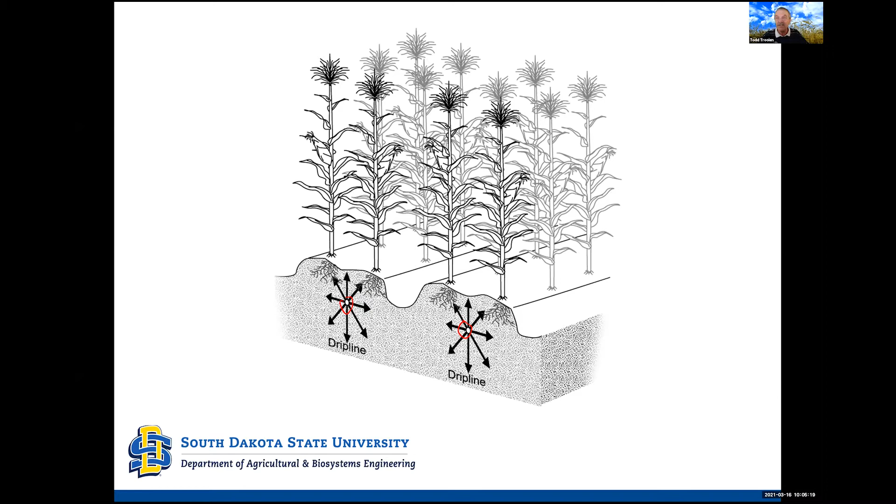So we bury those drip lines maybe a foot, maybe 18 inches deep, anywhere in that range or even a little wider is appropriate. That can be adjusted based on operator preference. Do you want them a little deeper? Do you want them a little shallower for any of various reasons?

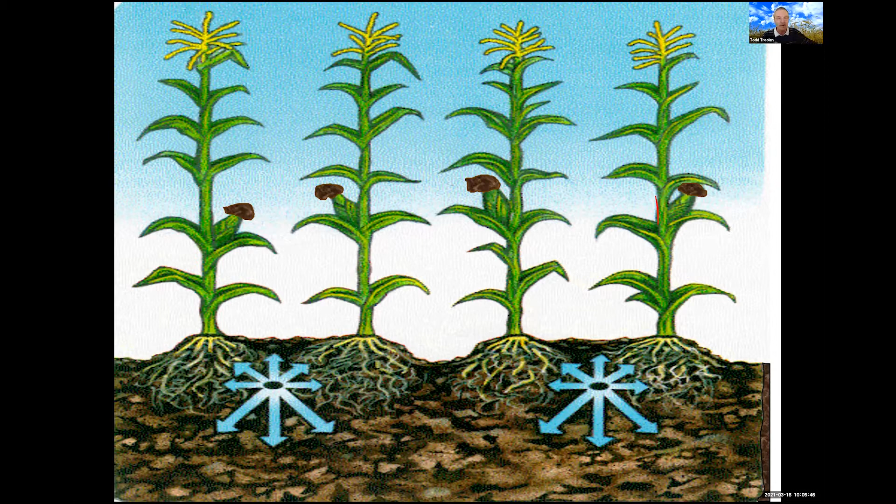If we look at a three-dimensional view, we can see how that works out. Every other pair of crop rows is centered over a drip line. And so theoretically, any plant is just 15 inches from the nearest drip line. And this works well for common soils.

Silt loam soils, clay loam soils, even sandy loam soils. If we get into really sandy soils, then maybe we need to do things differently. And if you have specific operator preferences to do things differently, I know of a producer that actually has drip lines spaced 30 inches apart, and they're really happy with that system. So there are options and adjustments that can be made based on personal preference.

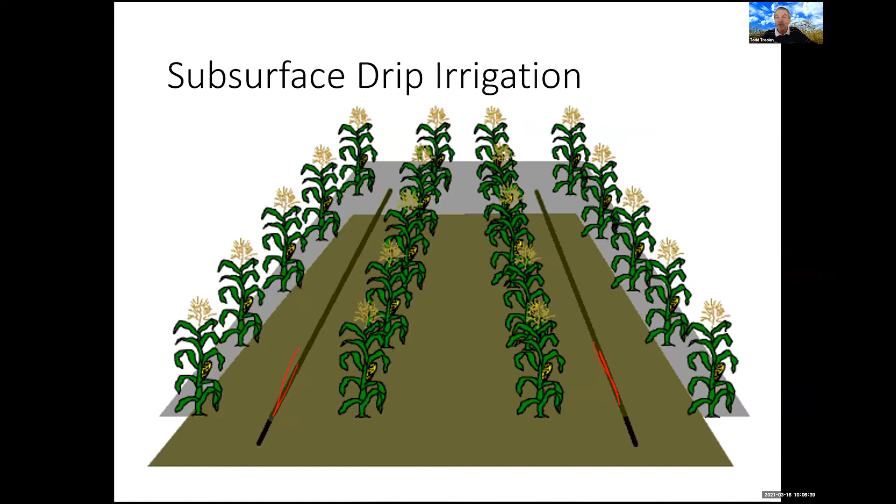So when we bury these drip lines in the soil, then in the root zone, we're depending on the soil to help move the water. And so here's an image from Northwest Kansas in a silt loam soil, and you can see how the water moves away from that drip line. It's moving laterally, it's moving upward, and certainly it's moving downward. And not surprisingly, more is moving downward, because gravity is helping it in that direction. But certainly water's moving sideways and upward too, and we depend on that to move water from the drip lines to the crop roots.

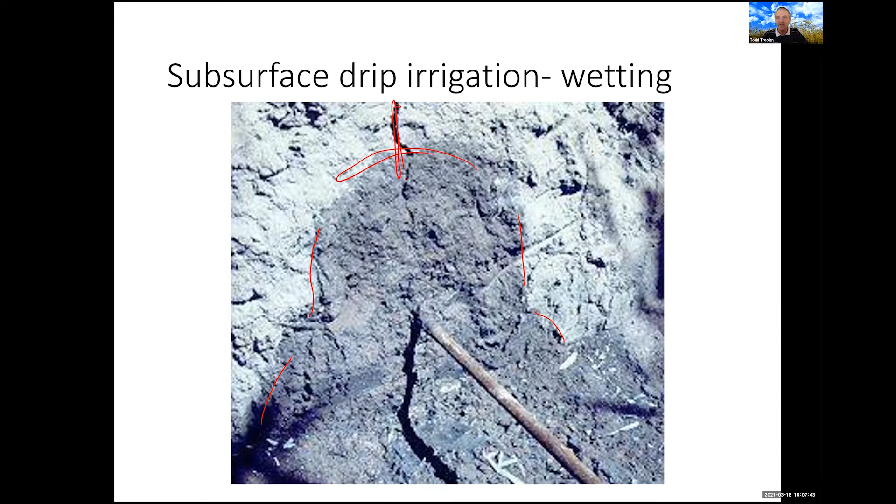One other interesting thing about this image that I want to point out, this image was taken about 10 years or so after installation of the drip lines. And you can still see the shank mark there 10 years after installation. So that persists. And speaking of the shanks, here's an image of a drip plow. Not the only drip plow in use, to be sure, and not the only design, but one good design.

So for SDI, we buy our drip lines on rolls. Generally, we're talking about thin wall drip lines or drip tape, and so it lays flat on those rolls. We buy a roll, and that roll is injected into the soil at the trailing edge of the shank. So we can have multiple shanks install up to maybe 4 or 5 drip lines at any one time. In this case, we're just installing 2 at once. And commonly, with subsoiler shanks like this, it takes about 50 horsepower or so per shank. So it's not an inconsiderable power requirement for this system.

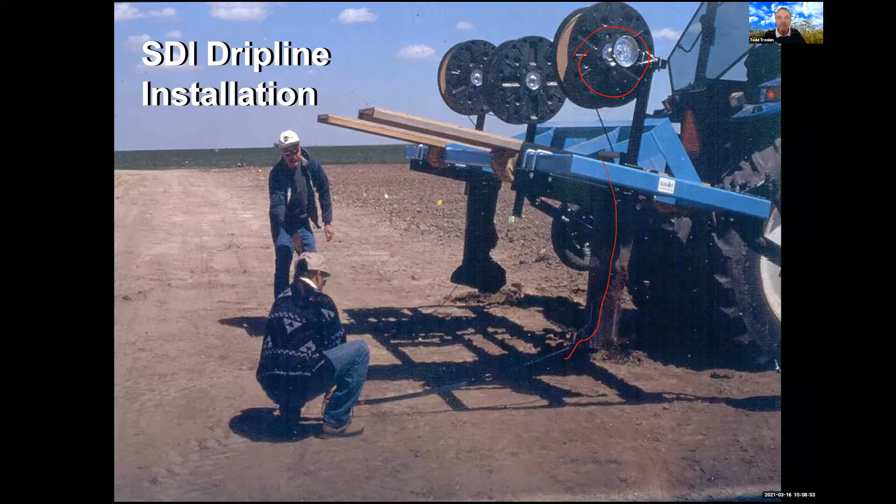Okay. So a schematic of what a system might look like here. And all of this is not unique to SDI. That could be for any irrigation system, certainly a water supply, whether you're pumping groundwater or whatever your water supply is. And then various backflow prevention devices to protect our water supplies. May or may not have a chemical tank and injector pump for center pivots or surface irrigation. Those are required in some form for SDI systems, as we'll talk about in a couple of minutes. Filtration system, again, required for subsurface drip irrigation systems, may or may not be required for other irrigation systems. And then our field with multiple laterals and a distribution system to get the water to the crop root zone.

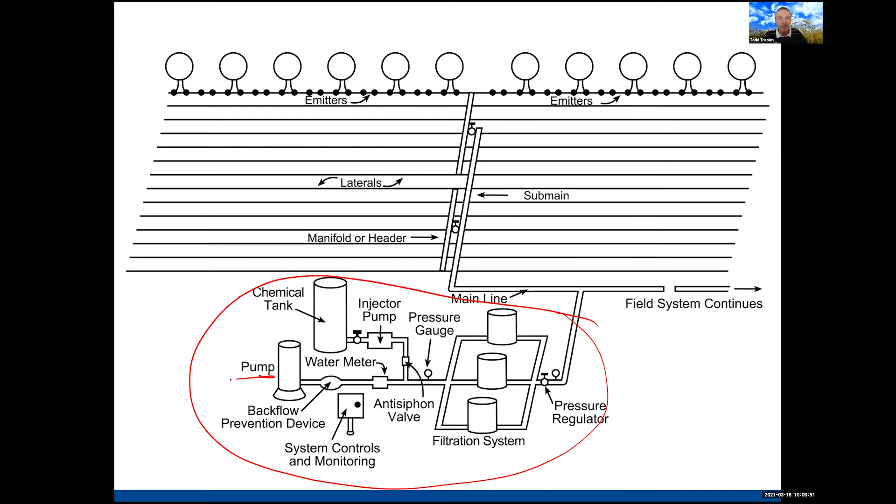So a quick note here about where does SDI fit? Traditionally, we would think that surface irrigated fields are a nice target for conversion to SDI because the topography is already set up nicely for SDI, generally flat or a small grade in one direction. So that's a good fit. But of course, not every field is flat enough to surface irrigate. So if there is some topography in the field, then what we usually need to do is use PC or pressure compensating emitters. And that allows us to actually run the laterals up and down some topography.

Now, we can't go up and down steep hills, really large hills, because the hydraulics would result in non-uniformity of irrigation application. But if we use these pressure compensating emitters, then we can go up and down some hills. And indeed, we're seeing those PC emitters used in some of the systems here in South Dakota. PC emitters are probably a little more expensive and take a little more management, or you want to use a little more caution to keep them clean. But certainly they're being used and used well, and that's a good application of them.

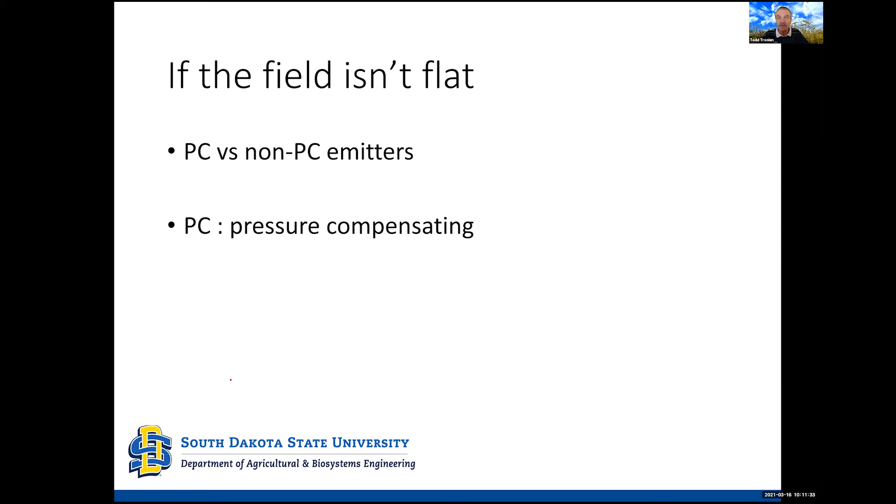Okay, let's spend a few minutes on why we would want to use subsurface drip irrigation and some of the advantages. These first two work together hand in hand, although they're not the same, in that this is probably the best way we know how to apply water uniformly to get to the crop roots. And not only is the water applied uniformly, but any fertilizer that we inject; many forms of nitrogen are really nice to inject into these systems. And salinity can be managed well because we can manage the water well too, if salinity is a question in your area or for your system.

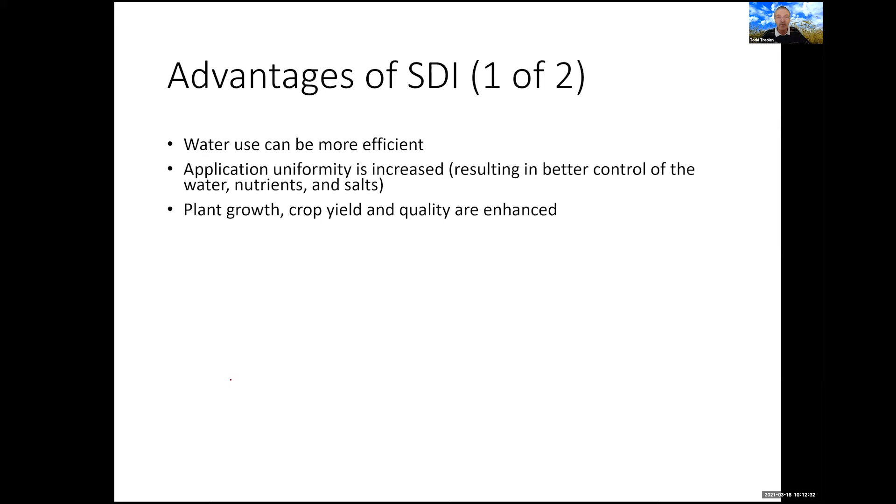Generally, we get good quality crops. In many places, we can see an increase of crop yield, fertilizer especially, but if we have some systemic pesticides or something we want to apply with the system, then again, that's applied uniformly because the water is applied uniformly.

Water quality hazards, especially the runoff issue, where we can drastically reduce or eliminate runoff because we're not applying water at the soil surface anymore. We're applying it directly into the root zone.

We can still cause nutrient leaching into groundwater if we're not managing a well-designed and a well-installed system, right? So we do have good control of the water, so we can avoid or reduce leaching, but we do have to use more caution to eliminate leaching. It's not as easy to eliminate as the runoff is here.

Where we're wetting the soil surface less than with SDI, then we can reduce especially weed germination. Generally, these are low pressure systems, so we can reduce energy costs, pumping costs mainly. If we keep the canopy drier, then maybe we can reduce some disease pressure, reducing humidities, improve cultural practices, and especially we can irrigate while we're doing cultural practices.

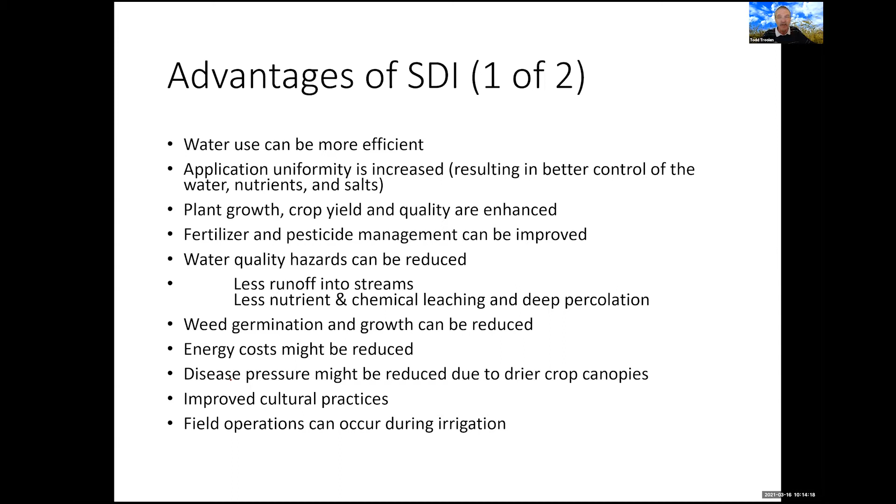And this can be especially effective for alfalfa, right? So we can continue to irrigate as we cut and harvest alfalfa, and that can really kick the regrowth then into high gear if we can keep the water coming during that harvest time. Okay, whole other page here of advantages, right?

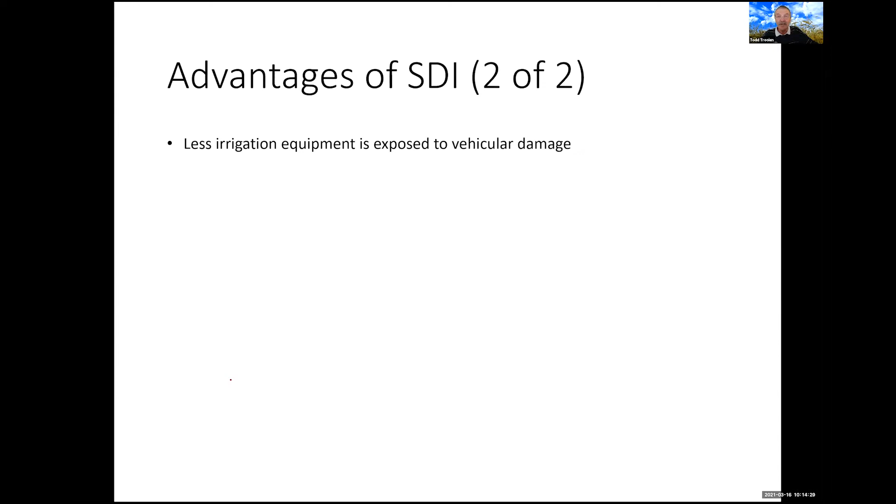Because a lot of the system is buried, then we're less prone to be running things over. We're not sprinkling the surface again, so we can reduce some soil crusting if that's an issue. For some areas, double cropping might be an option. Fewer mechanized parts also plays into the ease of automation, right? Just in many cases, a relatively simple solenoid valve and a controller can automate these systems really nicely.

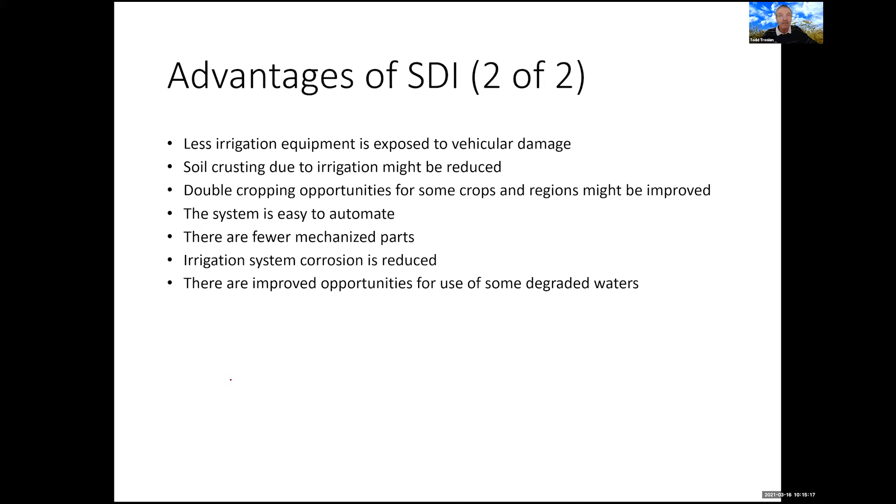A lot of the system is plastic, so we can reduce corrosion, which also relates then to use of degraded waters, especially things like animal wastewater, feedlot runoff, which have been successfully applied through SDI systems. Perhaps swine wastewater collected and then used through irrigation systems. SDI is used extensively in Israel for application of treated municipal wastewater.

And especially high wind, but low temperatures are then not an issue, so we can keep irrigating if that's an issue early and late in the season especially. And we can match the field sizes and shapes. We're not limited to a circle in the middle of a square, for example, for a center pivot. And we can space things to meet what we need, and with these pressure compensating systems, we can go up and down some slopes. And finally, maybe some germination possibilities, but this can be difficult.

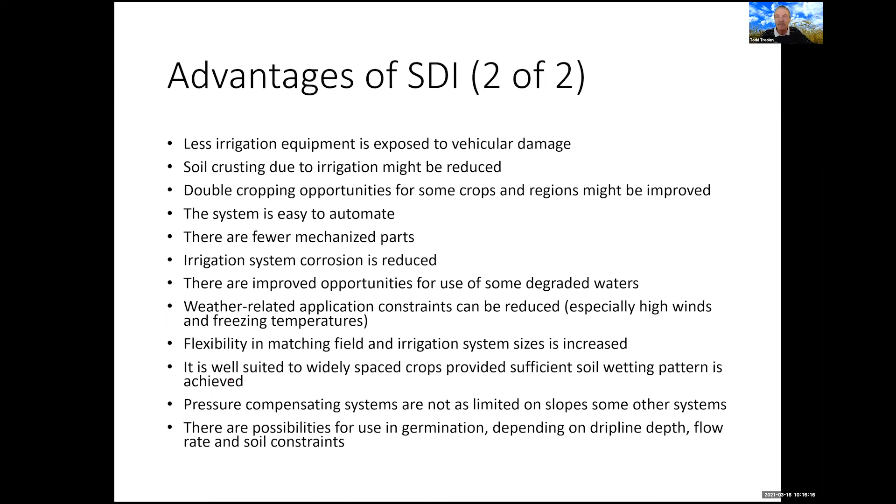Okay, so got a quick question in here. The question is, any problems with root intrusion using SDI with alfalfa? Yes, root intrusion can be an issue. I have not heard of specific reports of alfalfa root intrusion. There are some other crops that seem to be more prone to root intrusion, but this can be an issue with perennial crops, right? If the crop roots are growing for multiple seasons, they might grow into the drip lines. It hasn't been as much of a problem in alfalfa to my knowledge.

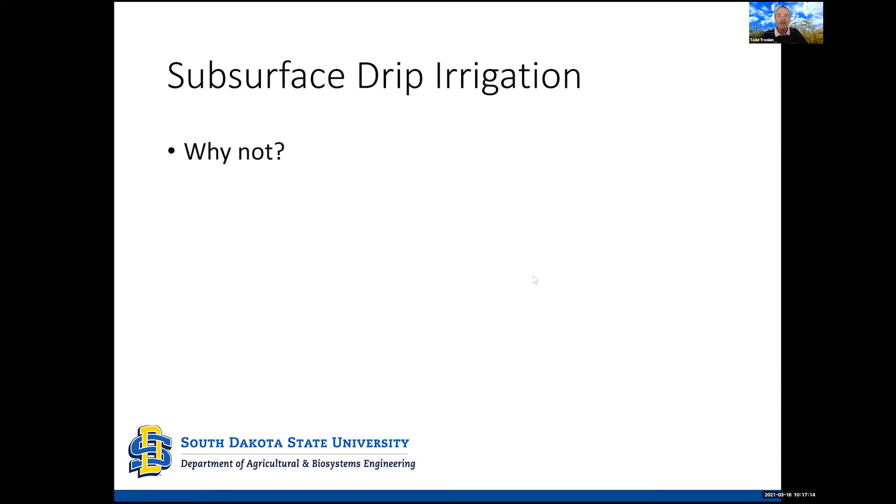Okay, so disadvantages. We'll just start with a whole list of them here, rather than building the list. So expensive. They're expensive to install, maybe $1,500 to a couple thousand dollars per acre, right? And again, that can go up and down based on your system and your bells and whistles, but it's an investment.

Secondly, then, worldwide, the main cause of loss of micro irrigation systems is emitter clogging. So we've got to keep those emitters clean, and we'll step through a 5-step program here in a moment to see how we can do that.

And then the next two, the maintenance and the visual indicators, kind of work together. Because we can't see water coming out of a sprinkler nozzle anymore, we have to use indirect measures to make sure the system is running properly. Flow meters, pressure gauges at various places in the system. We've got to use those to indicate performance, make sure things are working properly.

We do have to do some filtration, and we may need to do more than that depending on the quality of our irrigation water. If we have some particular clogging hazards, we may need to do other things. We may need to inject something for pH control, for example.

Because we're burying the system, subsurface repairs, got to do some digging. That's not inconsequential, especially where you have rodent problems, gophers, ground squirrels. They can cause great frustration, especially in the spring. We tend to see those kinds of damages during the off season over winter. So when you start the system again in the spring, you'll see leaks in the system where the gophers found it. And that can be frustrating.

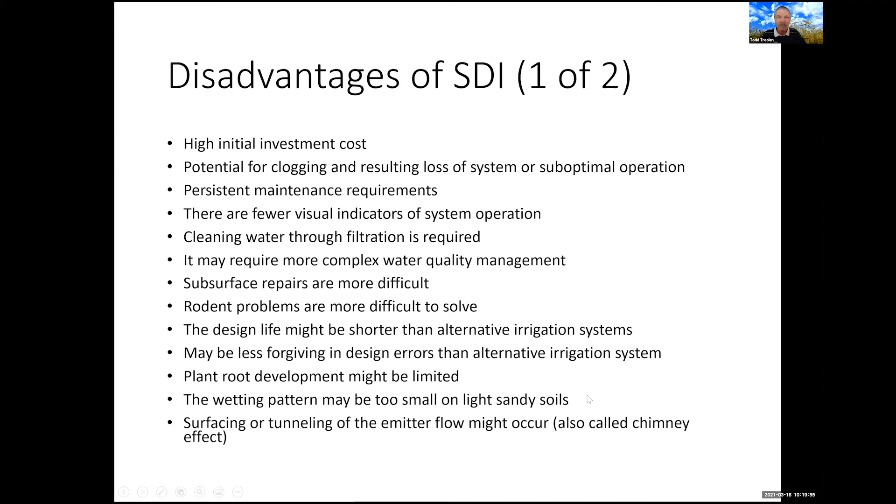And we also might see some chimney effects. We need to have air vents and vacuum relief valves in the system to keep silt from coming back into the system when we shut it down. It's not portable. Systems can't be moved from field to field. So we need to want it in the field where we've got it.

Tough for germination. Salinity could be an issue. Generally in the northern plains where we get some rain, we get help with salt leaching from that rainfall. So it's not as big an issue as places that are really, really dry. Tillage options, we need to be careful we don't go too deep with tillage. Length of run may be limited, but we can overcome some of that with large diameter drip tapes. So we can go half a mile in many cases.

There aren't as many systems out there, not as many learning opportunities. So a little less collective knowledge has been generated. What happens when the system is done? These systems should last a good many years, but not forever. What do we do with the plastic that's in the field then? Not as many systems around. There are turnkey systems available in South Dakota, so there are dealers working in this, just not as many.

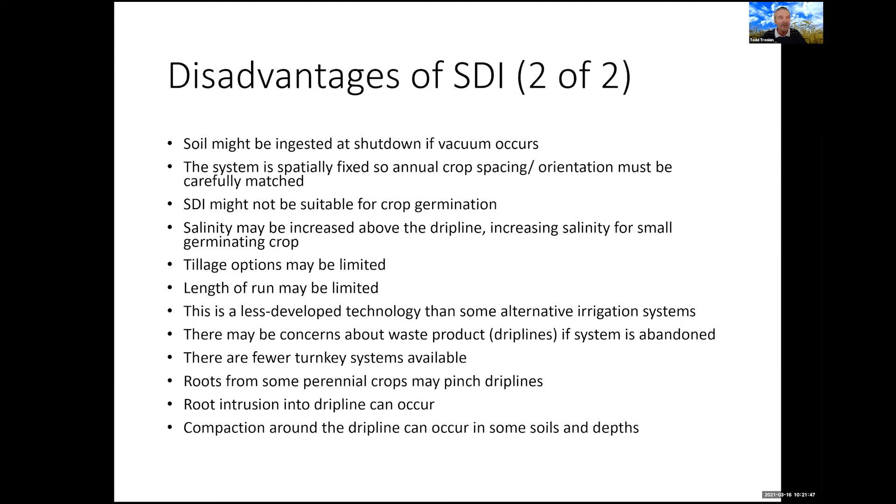And again, as Tom asked earlier, pinching drip lines or root intrusion can be an issue in perennial crops, and then compaction can occur in some strange cases. So you see some benefits and some disadvantages. In my remaining time here, I want to step through this 5-step program for keeping those emitters clean. And here are those 5 steps.

First of all, we select the proper emitters. And this is a compromise. We can get emitters in various flow rates, right? So larger flow rates mean larger holes, larger flow paths through that emitter, and that's easier to keep clean. But if we use smaller emitters, generally we can reduce the cost and the complexity of our installed system because we need fewer zones.

So there's our first compromise: zone size and number versus emitter flow rates or emitter size. And we've got to have proper filtration, and that may be as severe as sand media filters, the gold standard at this time. Or if you've got good clean groundwater, perhaps a really simple screen filter is adequate for your supply. The manufacturer of the drip line you select will have specific filtration requirements for their products, and the dealers surely will know about that and be able to help you.

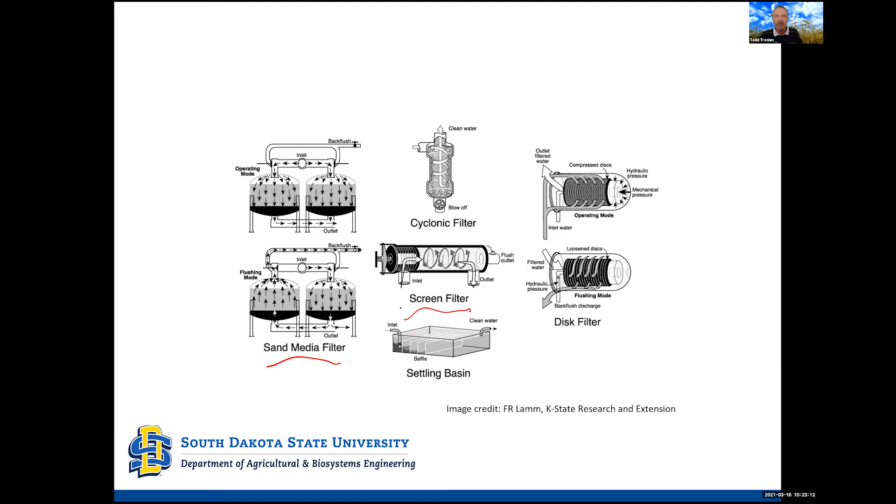So again, this will be based on your water quality, your water supply. Now, you can also use these injection facilities to apply fertilizers too. So that's one of the real benefits of SDI.

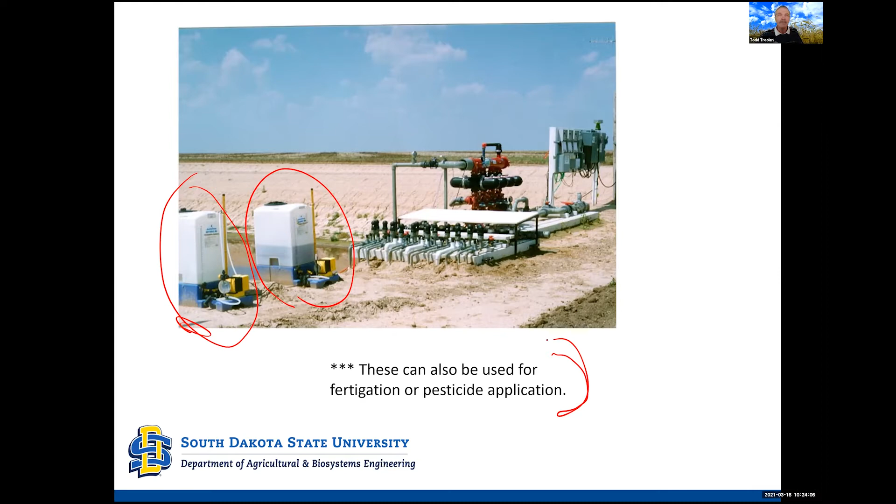Even though we're filtering that water, there's still smaller stuff that gets through, and we've got to remove the stuff from the drip lines. Again, if you've got clean groundwater, that may be a once-a-year kind of operation. At the end of the growing season, you open the flush valves and clean it out once. If you're pumping feedlot wastewater, then you'll do that more often.

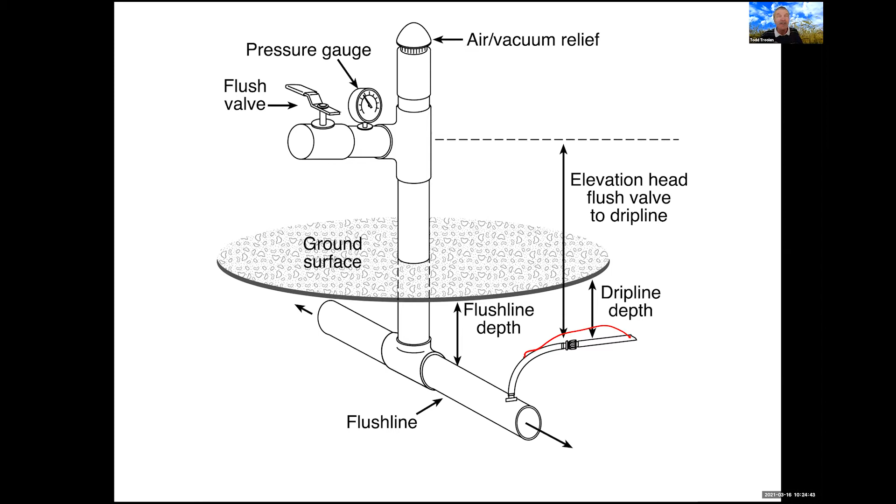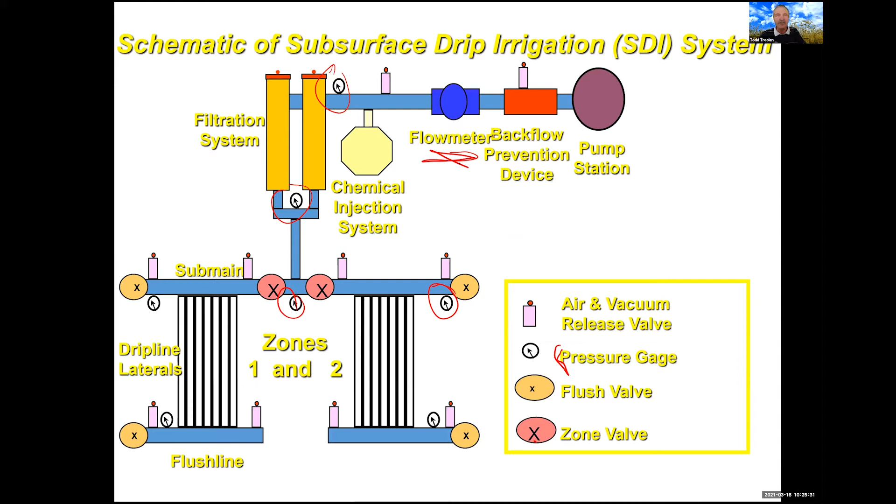And then finally, we need to monitor the system to make sure that it's operating properly. And again, we can't see water coming out of sprinklers or anything. We have to use things like pressure gauges at various places in the system to make sure that our pressure and our flow rates are appropriate and are staying within our design guidelines, right? And so if we track and measure flow rates and pressures, then we can make sure that things are running properly and we're not starting some clogging or have a leak somewhere.

So there's the 5-step program then to keep those emitters clean and keep that irrigation system operating as designed and as installed for many years.

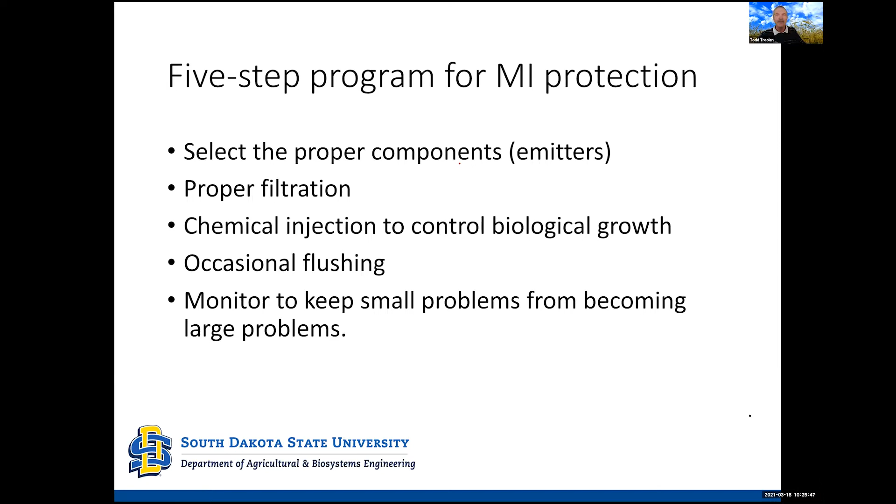So there is the brief introduction to SDI, subsurface drip irrigation.

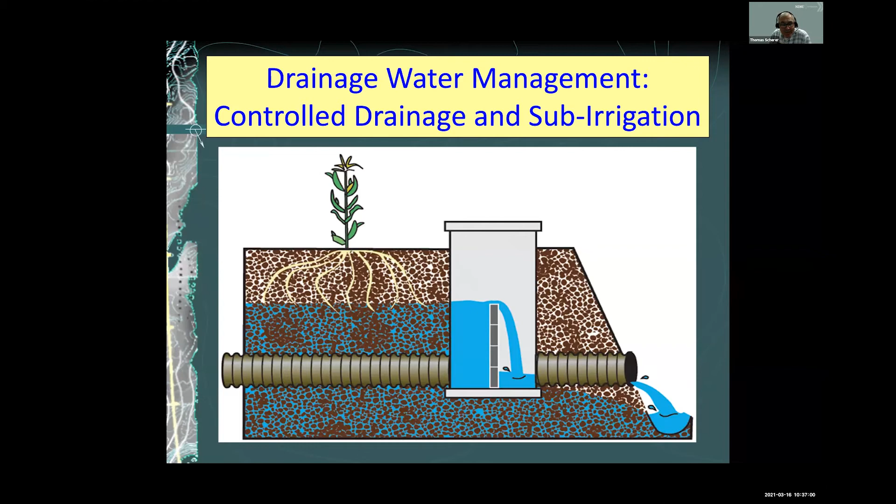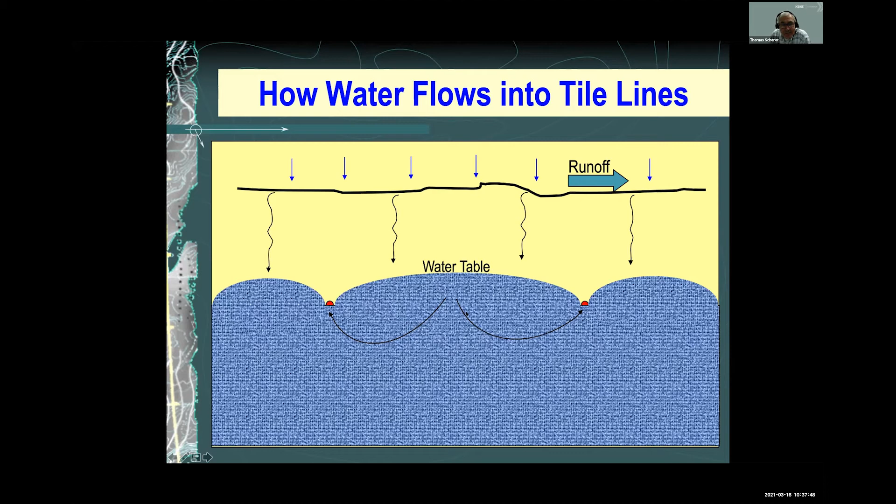But if you're going to use this for sub-irrigation and you're putting water back into the tile, now you create the mound over the tile, and you've got to put enough water in there to move the water laterally because you've got roots down here that are using it. So you form a mound between them so that you get the water out here so the crops in between the tile can access it.

And because crop water use in the summertime gets very great, the movement of water through the soil has to be faster than under drainage conditions. So tile under sub-irrigation has to be put closer together to make sure you get that water to flow across. Otherwise, you can end up with variable growth. We saw that a few years ago on one field where the tile was spaced 60 feet apart, and you could almost see where the tile was because the soybeans responded. It was a dry year.

So when we talk about sub-irrigation planning, the biggest problem that we have up here is finding a water source, because typically the areas that you drain are not over aquifers. They may be close to streams, but the stream may dry up in August, and you might have to have some kind of a capture pond with an alternate source of water. Because we're tiling heavier soils in general, with some people draining sands around the Oakes area,

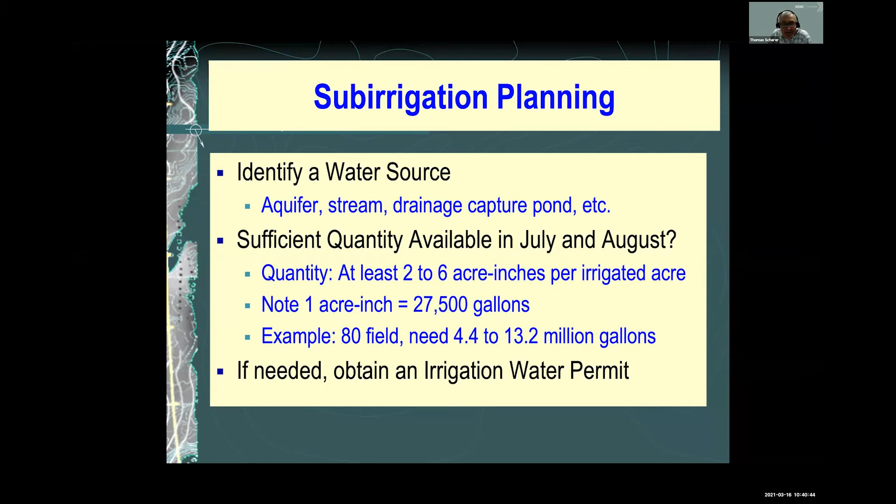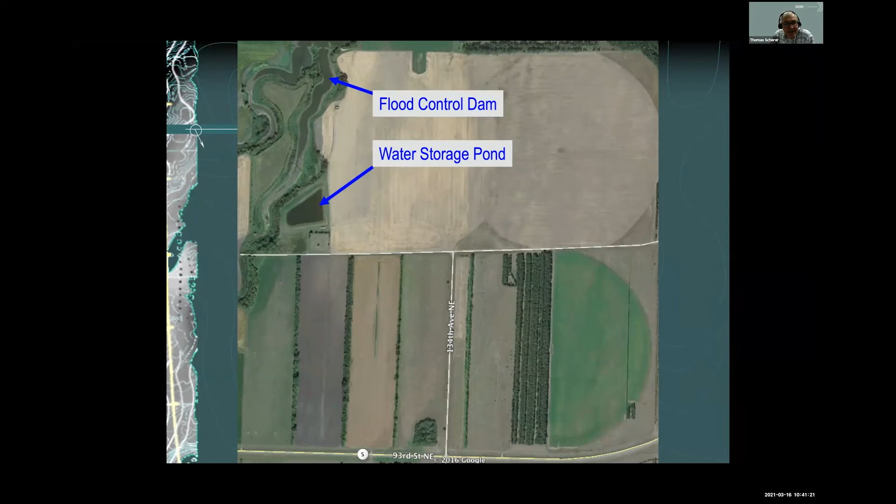To give you some idea, the footprint for this pond is a little over 6.5 acres. The pond area itself is about 3.6 acres, and the water depth in the middle is about 15 feet. So it stores about 45 acre-feet of water, which is enough to supplement what they get out of the flood control dam in July and August. That doesn't mean that some years they aren't going to run out of water.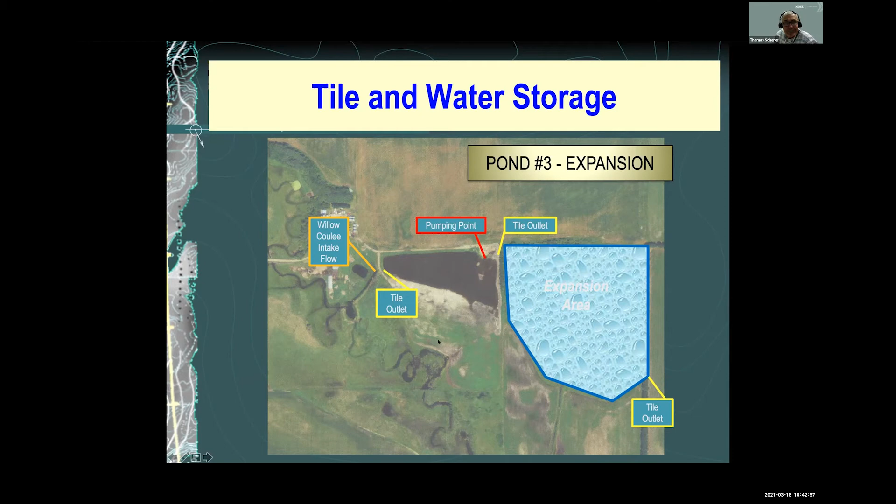This is courtesy of Bob Ibbotson up by Pembina, North Dakota. He has several systems like this because there's no aquifer, so he has to catch spring runoff water. So if you're looking at planning, you look at the field topography, kind of like what Todd was talking about.

The slope of the tile should be less than 0.5%. Once you get above that, it's kind of hard to back water up and get water to flow into the tile sufficiently. I'll show you that. And I have to throw this caveat in there that the field should require drainage, because we've had some people put in tile in fields, they thought they had a high water table problem, but they never did.

This is hard information to find out, but that retarding layer, whatever causes the high water table, should be fairly parallel with the surface so that you don't end up with a whole bunch of water in one area and not in another. A lot of this kind of information comes from local knowledge, somebody that knows the field, has farmed it for several years and has watched the water patterns and where they may and may not have got stuck.

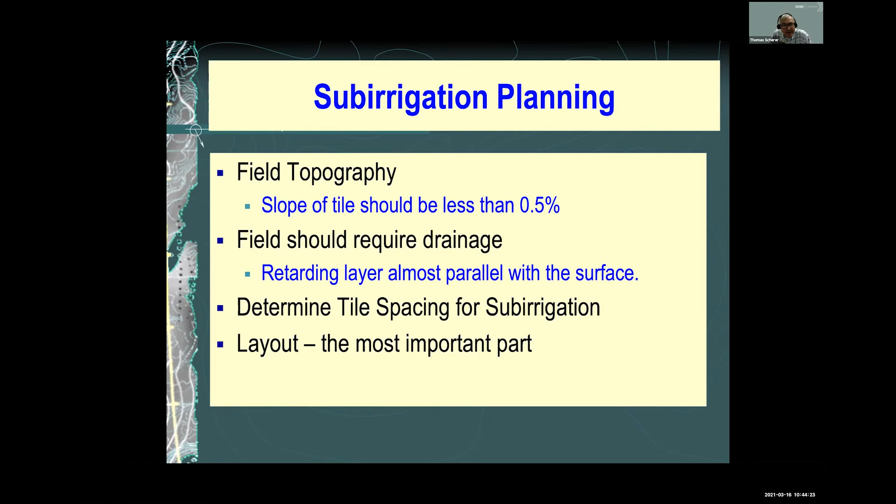Once you work your field layout, you got tile spacing for sub-irrigation, and then you got to put a layout in there. And like I said, you need control structures to manage the water, and it'll become more evident in a minute. One of the nice tools that we use is the drainage calculator on the iGrow website. I use this in our tile drainage design workshops, and I just did a session on lift stations for tile drainage in Wisconsin and Illinois, and they use this quite a bit.

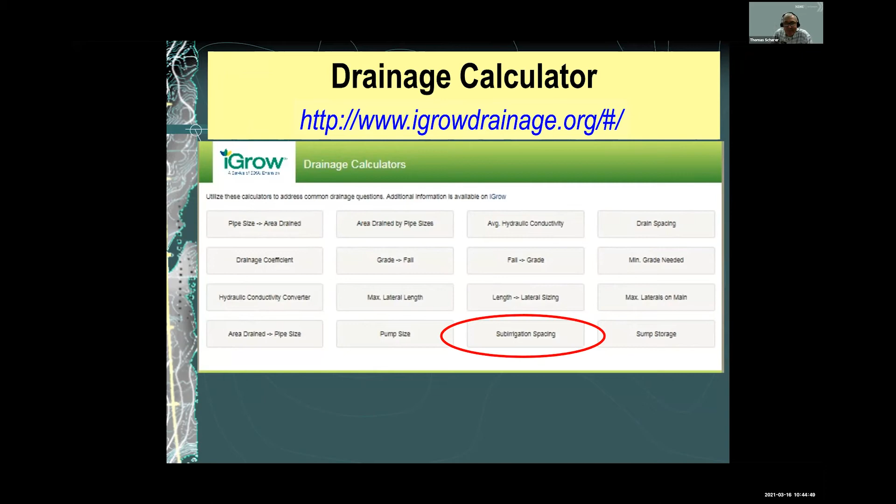Chris Hay did a tremendous job when he put this together, and if you notice down here, it'll calculate sub-irrigation spacing for you. All of this part here is exactly the same as you would use for designing a drainage system. The only difference is you got to put in a design evapotranspiration rate of the crop. I looked at the peak averages of a lot of our crops, and for North Dakota conditions, it's about 0.27 inches per day. That's the peak, and that would be a design point.

That doesn't mean there aren't some days when it gets up to 0.35, but there's other days when it's only 0.15. But the average, and I've looked at many years, is around 0.27. So I stick that value in there, but you can put anything you want. And then the rest is pretty straightforward. When you hit the calculate button, it gives you a spacing.

Of course, the most important part of this is the KSAT value, how hard it is for water to move through the soil. The lower that value, the harder it is for water to move. So anyway, you have that resource available to you right there in the iGrow website. Very handy; it's got a lot of calculators on it.

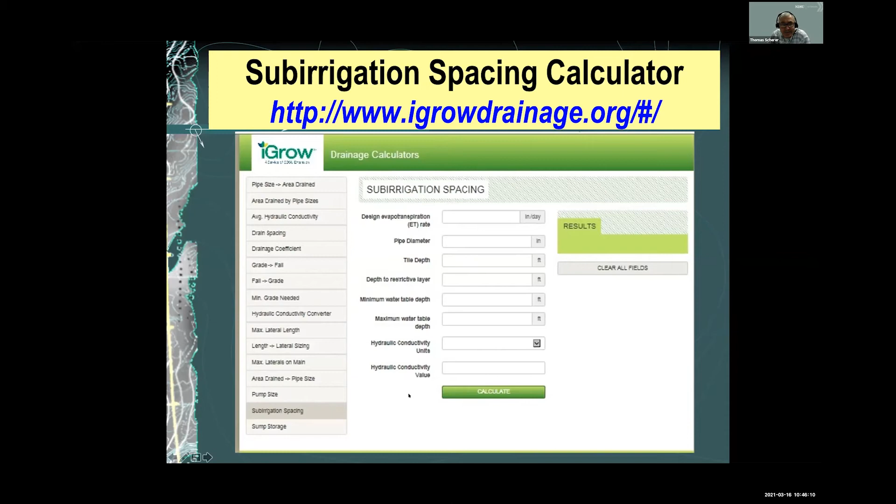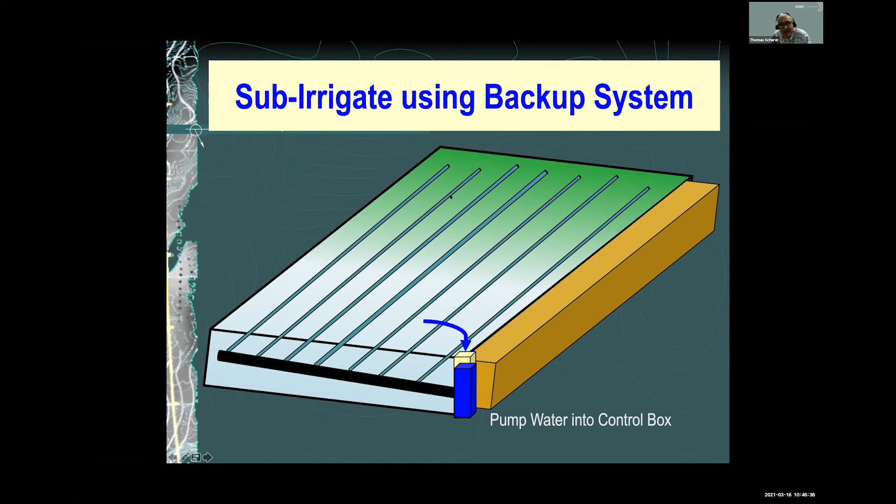So there's two different ways you can sub-irrigate. One, you can back up, and this is the most common. This was researched pretty heavily in Michigan and Ohio and some other places. Basically, you got your main here and your laterals attached to it, and you pump into your control structure and back the water up, and it goes up the pipes, and as it goes up, it seeps out into the soil. So that's one common method.

And if you've ever driven up to the Red River Valley, we've got lift stations all over the place. If you happen to have a lift station, you can use it the same way by pumping water into it in the dry period and backing water up.

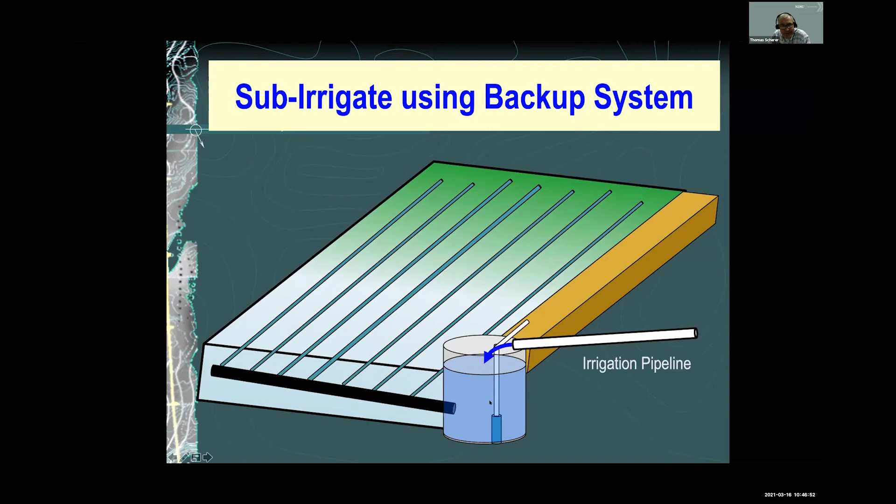The other method, and we have one cooperator here, he's in Minnesota, about 17 miles from Fargo. He put in a drainage system with control structures, but he put a separate set of mains up here, and he pumps the water in here and lets it flow down, and then he controls the outlet here, so he can adjust his water flow here.

And so that type of system, I couldn't find anybody else that had put it in. People have talked about it, but he put it in, and for 10 years now we've been kind of learning as we go. So is he. But he's put this on quite a few acres of his land now, so he's become quite familiar with how to use this practice. And he raises sugar beets on these, along with corn, soybeans, and wheat.

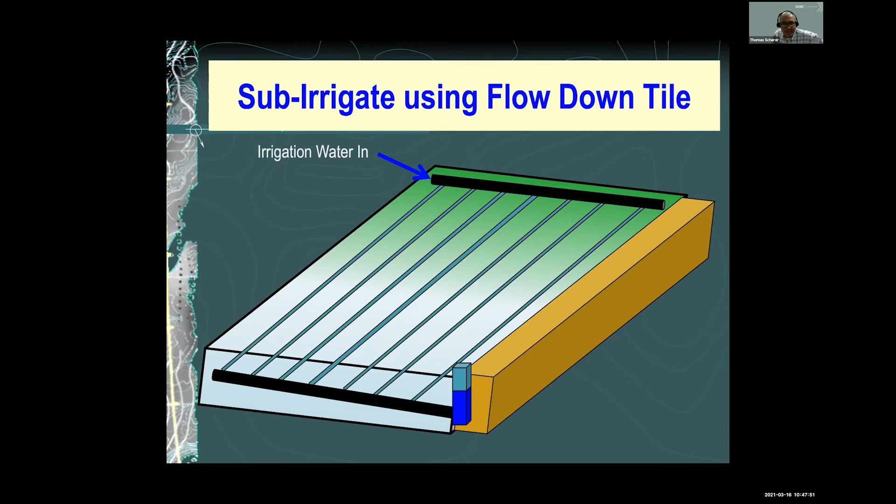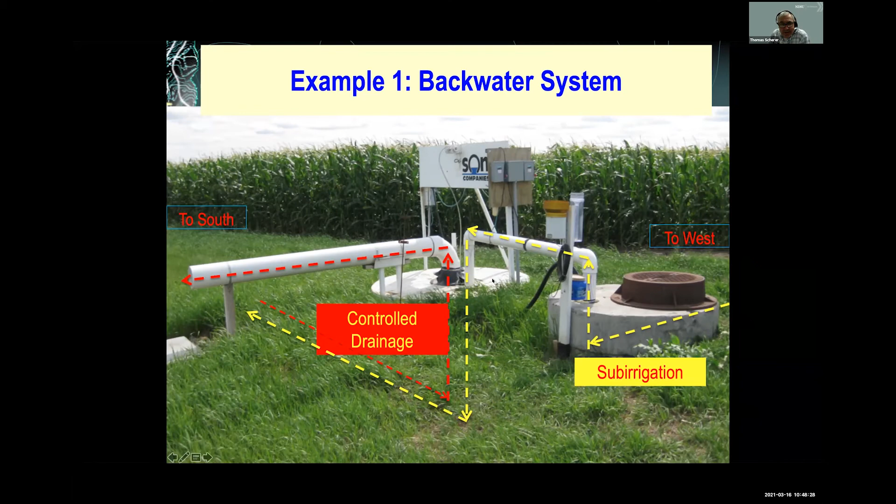So I'm going to do this real quick. When he first put this system in, this field was tiled in 2003, and the southern half of the field was the problem area. So he didn't tile this half, but he tiled this half. And we started doing research out here in 2008. And of course, he has a lift station up here that goes into this county ditch. And then he drilled some wells up here and puts into the lift station and backed water up into here.

So we found out from observation wells out here that the water, this is a little over 2,000 feet, we could only back the water up 1,000 feet. None of the water got up here, even though the slope is 0.1%, or it's a 2-foot drop from here to there. It really only would back up about a foot, and of course it was flowing out. And that's what that's supposed to show.

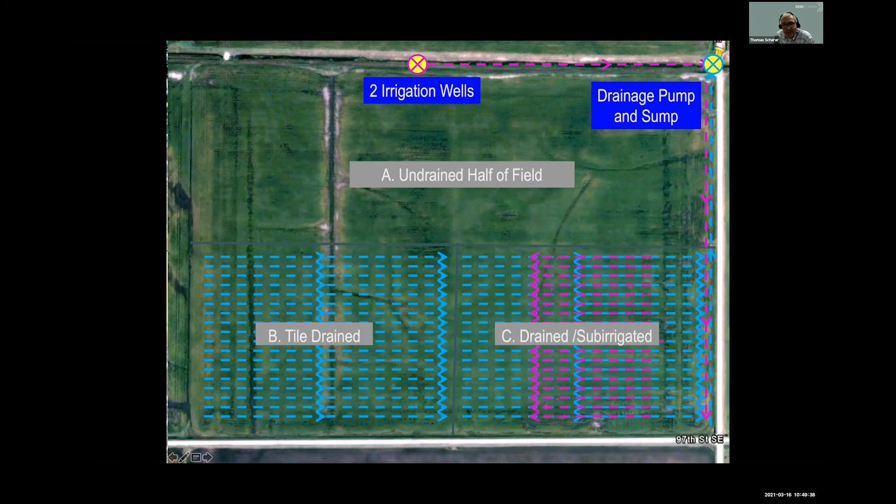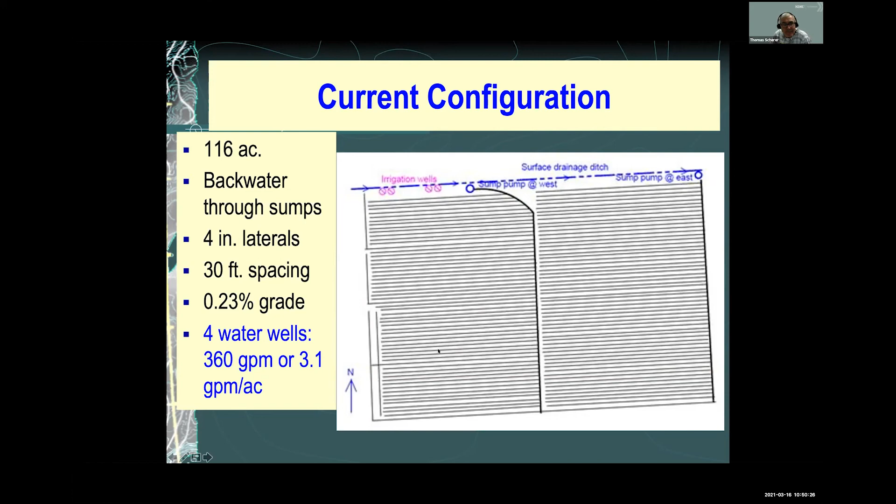So in 2011, and the spacing was 60 feet, he changed it. He redid the field. He went to 30-foot spacing, which for this soil is what was recommended. Then he split it. He put a main here, drilled 2 more irrigation wells, put another sump pump in, and so he sub-irrigates this. He pumps water into this one and does this half, and then can pump into this one and do this half. And it's a small aquifer, so his total production is about 360 gallons a minute, with about 180 going to each one of these. Okay, that's the first example.

Second example, this is the gentleman that put it in. He split his field. He put in 3 drainage mains here and split the field into, it's a 130-acre field, a 50-acre chunk and 2 40s. And so he's got 3 control structures here so he can manage these different sections of the field. And to sub-irrigate it, he put in 3 mains here. This main supplies just this portion, this main supplies just this portion, and this main supplies this portion.

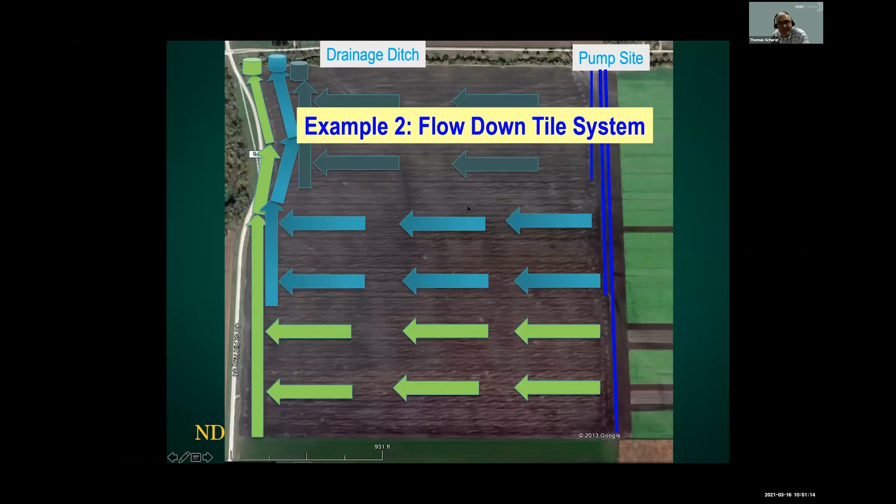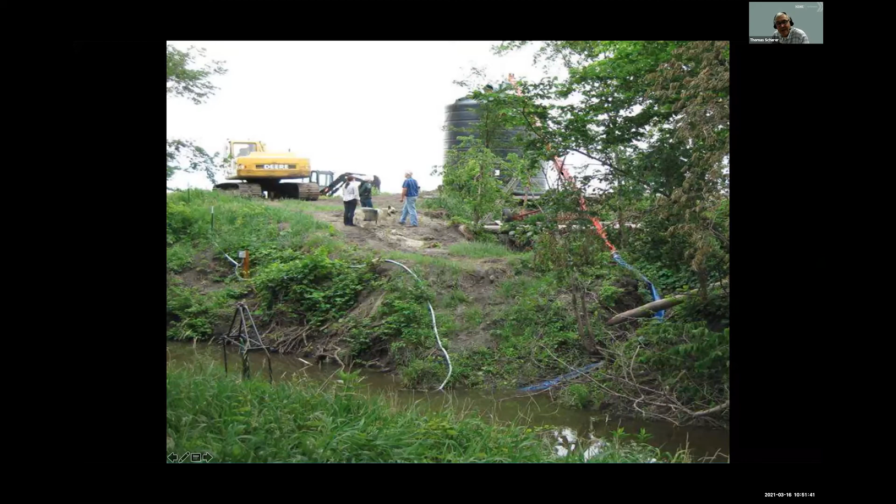He's got a drainage ditch that goes across the north side up here. It's kind of covered up, but this is a drainage ditch that goes back about 11 miles. So he's capturing water from other people and pumping it out. And he pumps out of here into a tank, it's a 10,000 gallon tank, but he fills it about halfway so that he gets enough head to push the water kind of against the slope up those mains so he can control it.

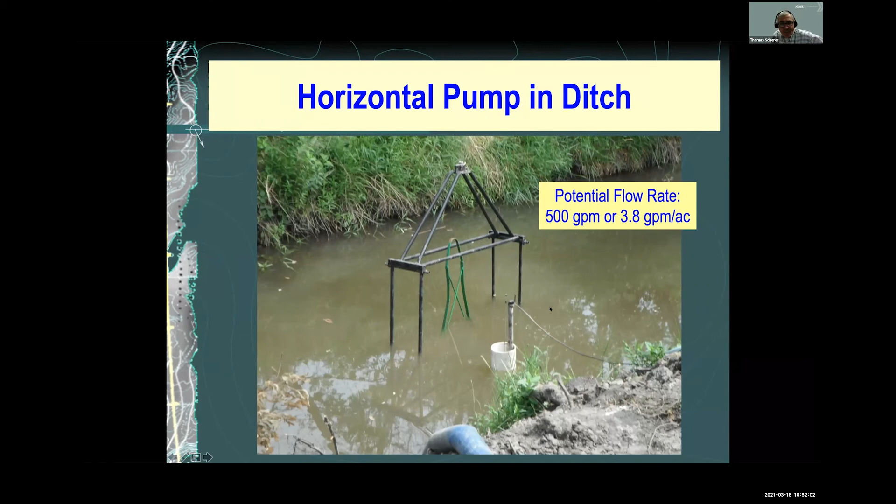Well, wait a minute. Sorry, let me back up. Now, in both of these systems, whether you feed it this way or you back the water up, what we found is you'd think with all the holes in the tile that the water going in here would seep out. But what we find is that water always takes the easiest path, and we end up the lower end of the field

becomes pretty wet here. In fact, in this corner, one year in sugar beets, he had 10 acres of a root disease because of excess water that accumulated. Of course, this is the lowest part of the field. And so they really found out that you've got to have observation wells out here sometimes to monitor these. And we had some for research, but they were up in this area, not down in here.

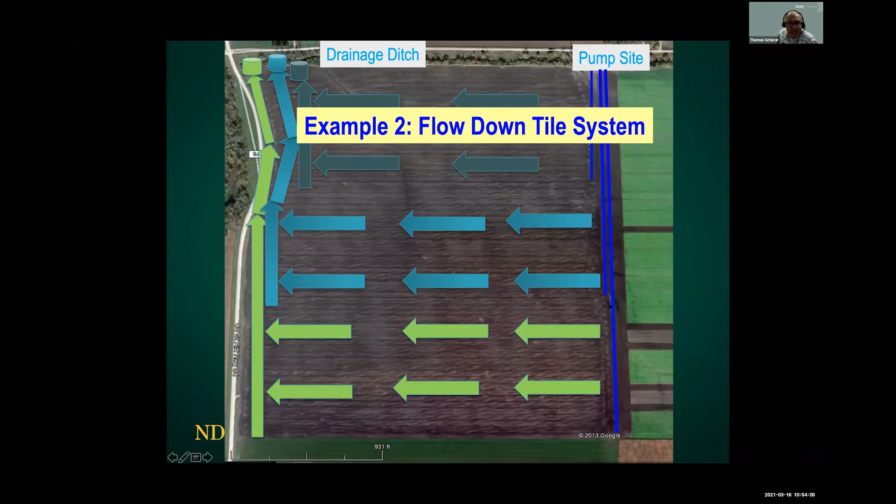And the ones where you back the water up, we found that this part of the field also gets wet. And the first example field actually had some drowned out areas because he was a little overzealous with running his irrigation system. So you've got to fine tune that and really watch it carefully to make it work. The gentleman that runs this has now been doing it for almost 12 years, so he has a pretty good handle on how to manage his system. So

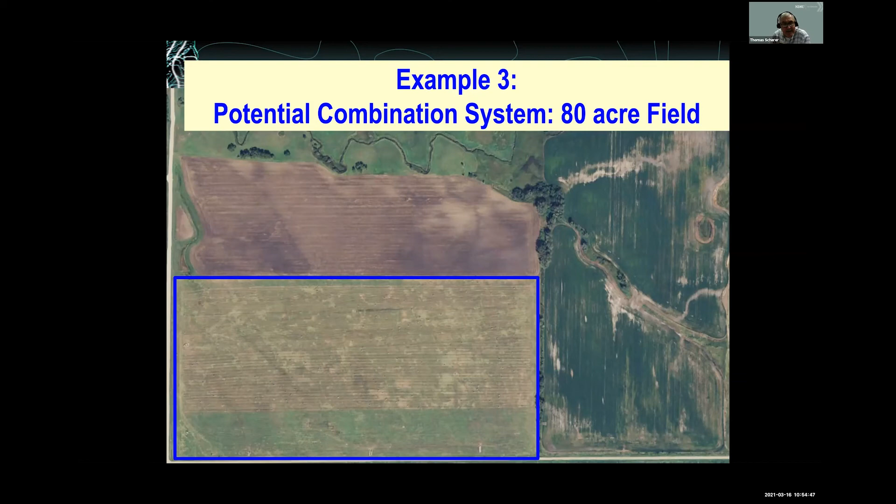I'm going to go to my third example. This is a nice sandy loam field. The problem is there's subsurface water coming from high ground to the east of here, flowing underground through here. And so this land, for many years, was in CRP because it was too wet to farm in the spring. And then later on in the year, it would dry up. And this farmer bought it and approached a tiler about tiling it so he could control the water, so he'd get in there and plant it in a timely manner in the spring.

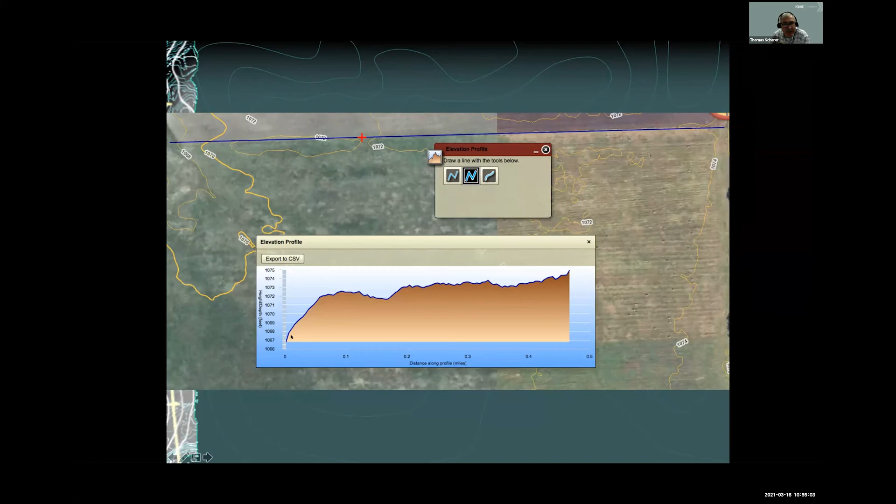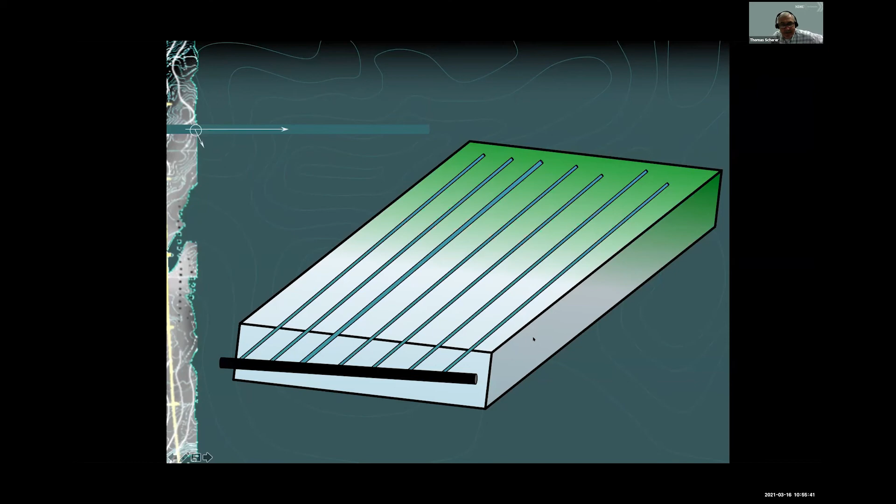So he got a hold of me, and I met with him and the contractor, and we said, well, let's look at some alternative designs. So what we did is we put the main down the north side, and then we put 4 control structures. This is the final design after a lot of discussion. And so there's about a 4-foot drop here. So every foot we've got a control structure. So he can set these elevations in here all the way out to the outlet and control the water in this area. And he can also then monitor how much of this subsurface water is coming. So that's what the farmer did.

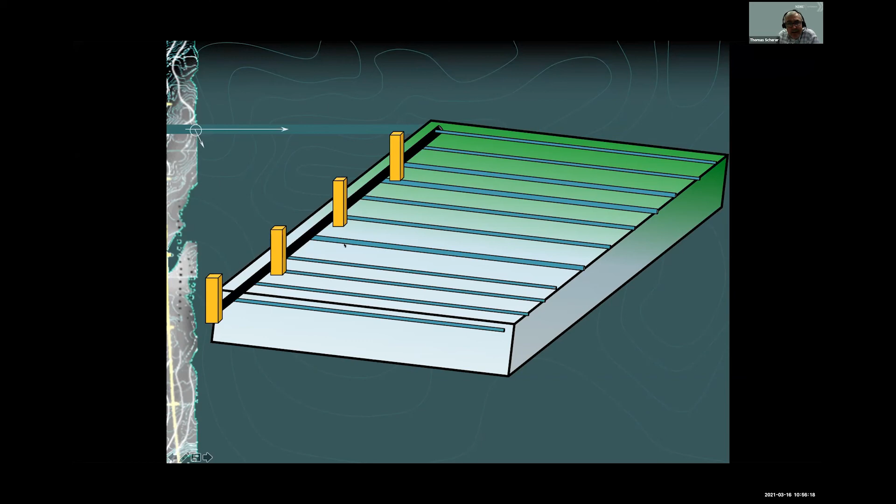And this is, you can see the hills in the back here. There's a gravel pit up in here. So water flows here and then it moves downhill this way, and that's what kept his field wet. So his outlet's here, and he's got 4 control structures here. And last year I just walked out there and looked at it, and he does have these blocks set, and he's controlling the water. He hasn't drilled a well yet because he hasn't needed to, but he could either drill a well back here and pump into this one and then let it stair step down, or he could drill it up here and run a pipeline up there, whichever is least expensive. But that's the third example of sub-irrigation, or people using control to hold water in the system.

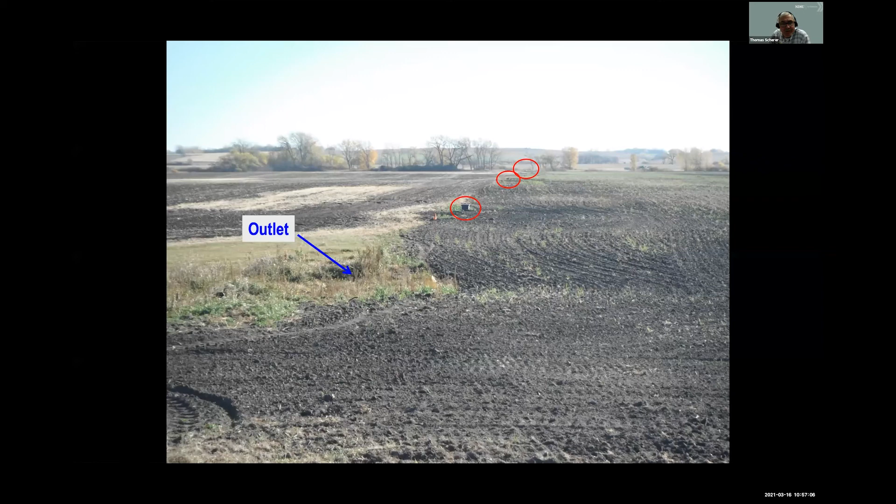And then I've got this example, a farmer up in the north central part of the state wanted to have sub-irrigation. He got a hold of AGREM. That's a company, I think they're out of Illinois. And they designed him a system.

And their system, the drainage lines are 15 feet apart. They're about 2.5 feet deep. And he ended up with 24 control structures in this field. And he made the investment. Like he told me, he says, it's not going to be paid for in my lifetime, but it will be in my son's. But anyway, so he had the system, and I couldn't get up there.

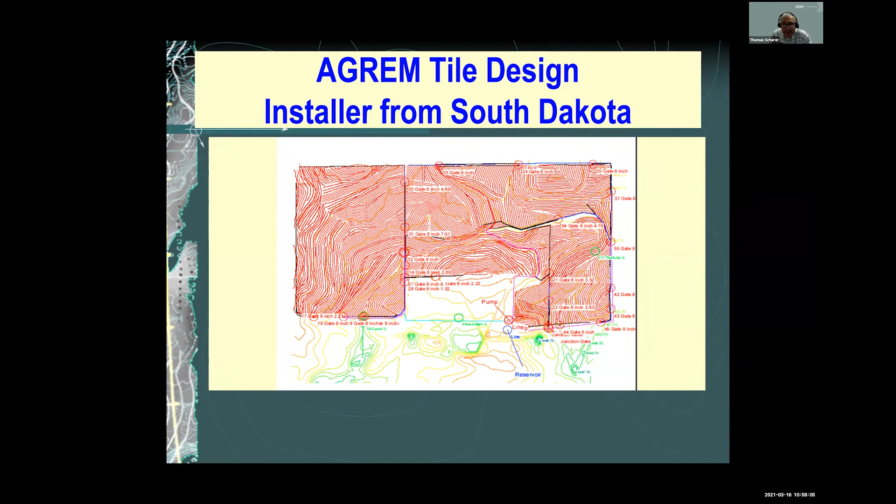I had conflicts when he was putting it in. He let me know, but I couldn't get up there because I had conflicts at the time. But in order to supply the water, he's got a drainage ditch that there's about 70 square miles upstream of this that comes out of the Turtle Mountain. So he's got usually a pretty good supply of water, and he can get water coming by even when it's dry at his place, because it may be raining up at what they call the Turtle Mountains, basically hills.

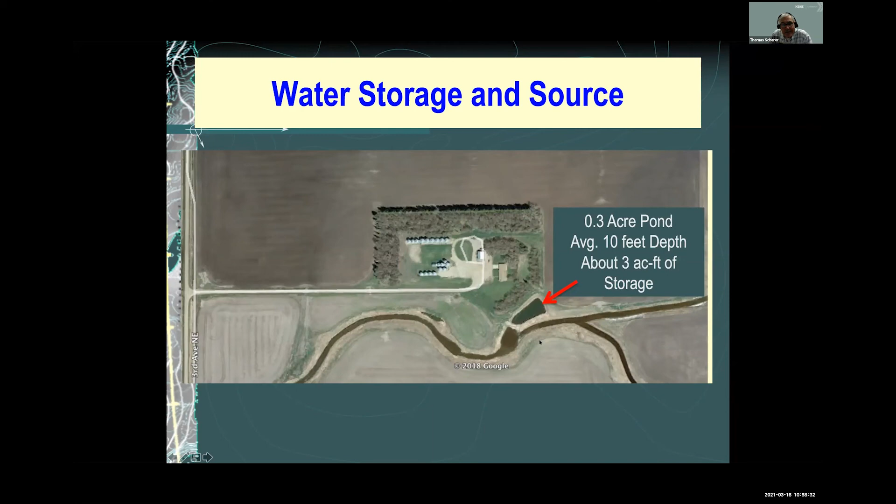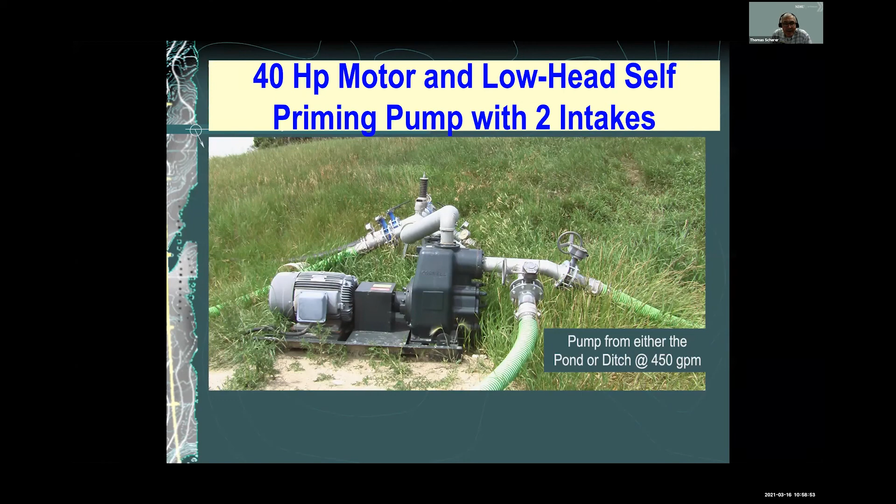But he dug a storage pond here to supply the water that he needed. He's got a pump, a VFD controlled pump, and these are all the manifolds going to different sections of his field. But he's got it set up so he can either pump out of the ditch directly, or he can pump out of the pond, or he can use the pump out of the ditch to fill the pond if he's not irrigating or doing it early. And this gives you a better idea of the manifold that he put in.

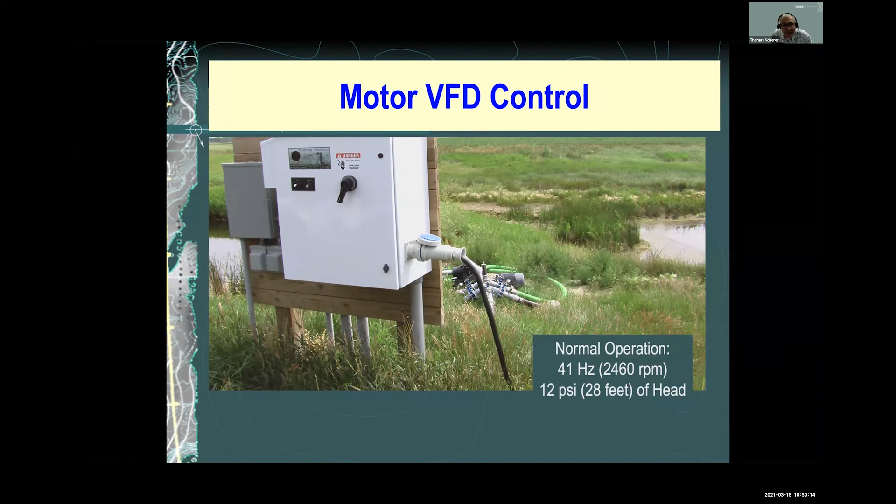VFD controlled. When I was there, he was irrigating. This pump was only running at 41 hertz instead of the normal 60, and developing about 12 psi of head. So, at each of his outlets, he's got a control valve. So he found that he has to adjust these at different parts of the field, because some parts of the field take water more readily than other parts.

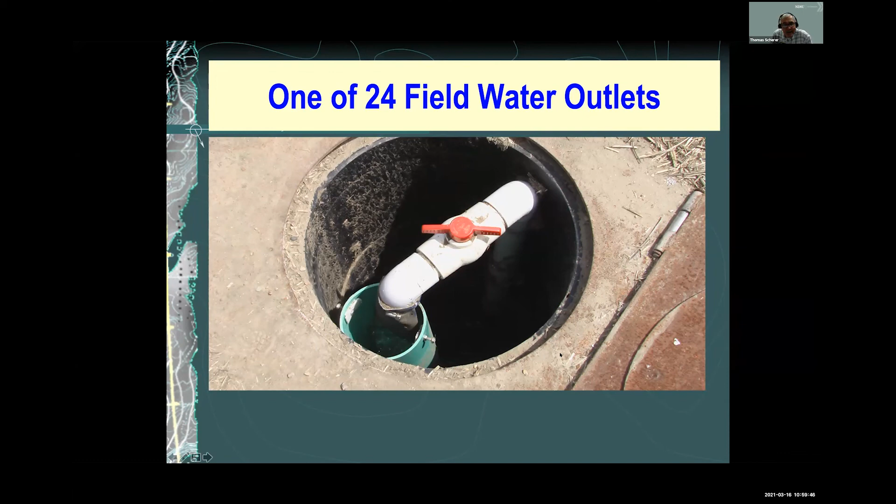So he's fine-tuned these, and usually once he gets them set, they stay that way when he starts sub-irrigating, unless he gets a big rain, and he has to go and pull these. But generally, it's not as much work as you would think. He only has to do it once or twice. And like I said, unless he gets a lot of rain and he has to go into drainage mode, then he just pulls this up and lets it drain.

And he made his own valve adjustment. It's just PVC pipe that he puts over the top and adjusts it. And he's got metal covers over all of them so he can find them. He's seen some pretty good yield increase with this.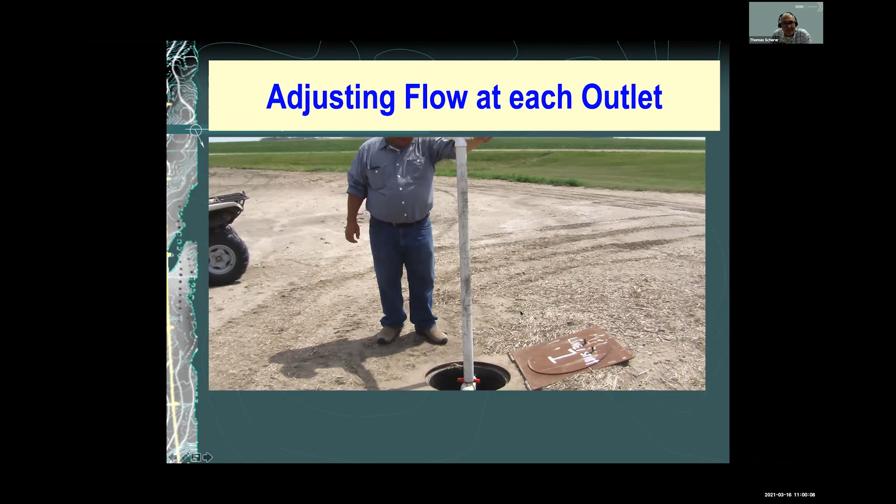So the last system I want to show you, and again, these are all farmer installed systems based on, I think all of these guys have been through our tile drainage design workshops, but in this field, he's got a low area here that's always wet. And then he's got an area up here that's wet in the spring, but it's a loamy fine sand up here. And then he's got loams here, heavy loams. And so, he's got a lift station here.

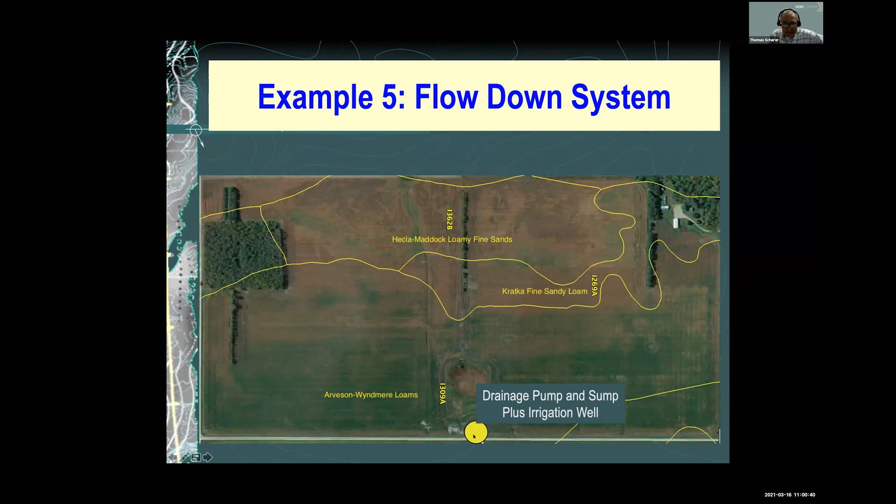So this is the west side of the field. This is where the lift station is, and this is the drop in there. So you can see from here to here, there's a 10-foot drop up in this area, and then it just levels off. So you get water infiltrates up here, moves underground, collects down here. So his lift station always seems to have water in it.

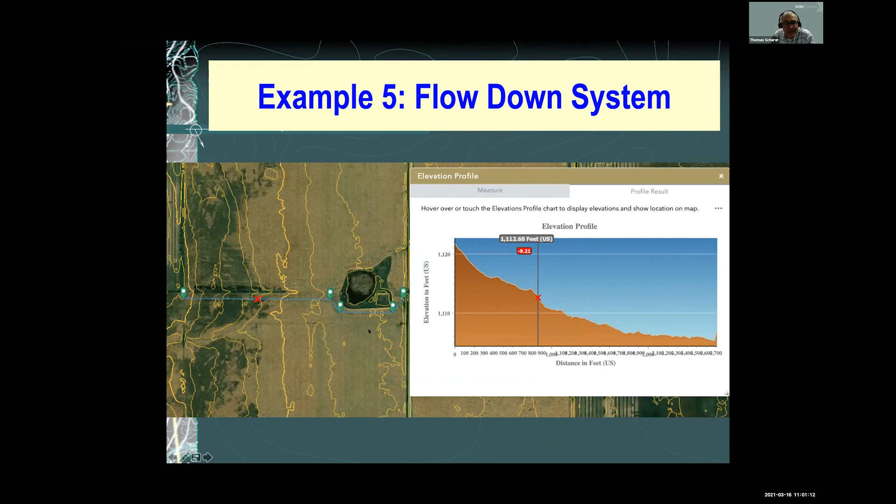So he and his sons designed this system where they tiled the whole field, and then up in this problem area, they went in between the tile and put in a separate system connected to this control structure. This one's tiled this way going down the hill, and this one's tiled this way going with the grain. And he's got a control structure, and he pumps out of here, puts it up here, and then he's got 2 diverter valves up here. I didn't put in all the lines here. This is all pattern tile down here.

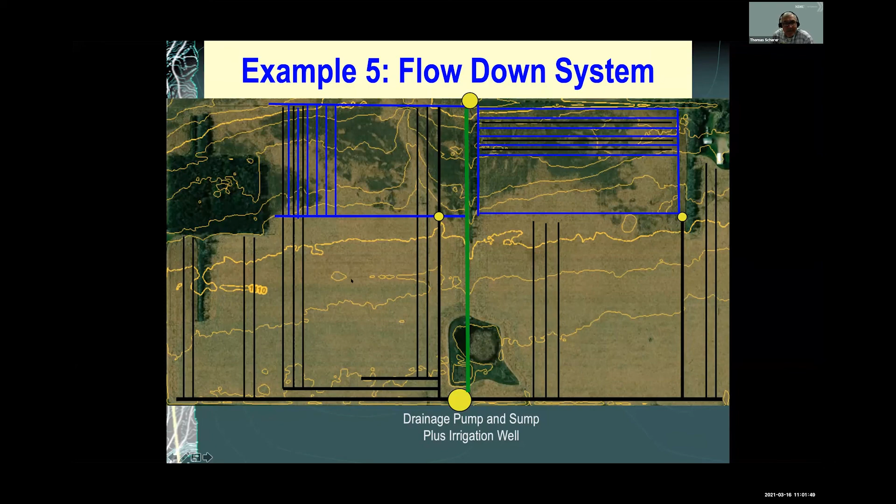So he had to drill a well to help supplement, but it's a very small well. He's got 50 gallons a minute that he pumps in here. And you can see this is the low part of the field, and this typically stays wet. In fact, there's kind of a wetland area right here and over here.

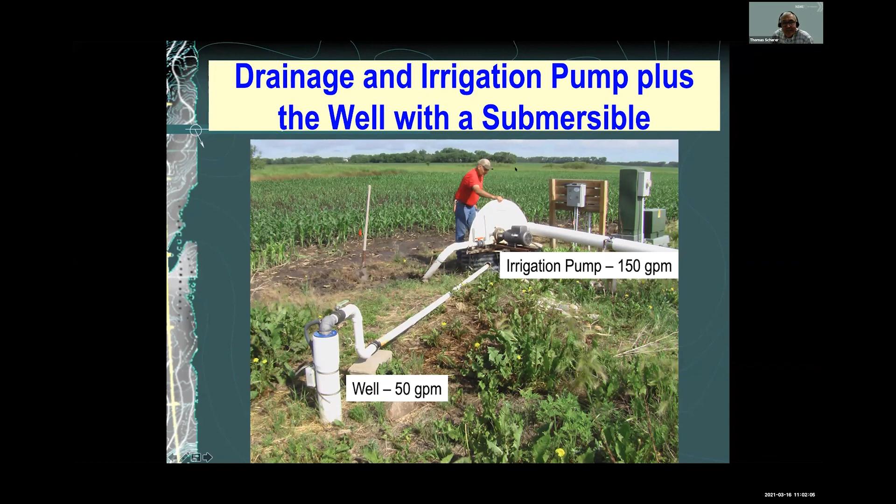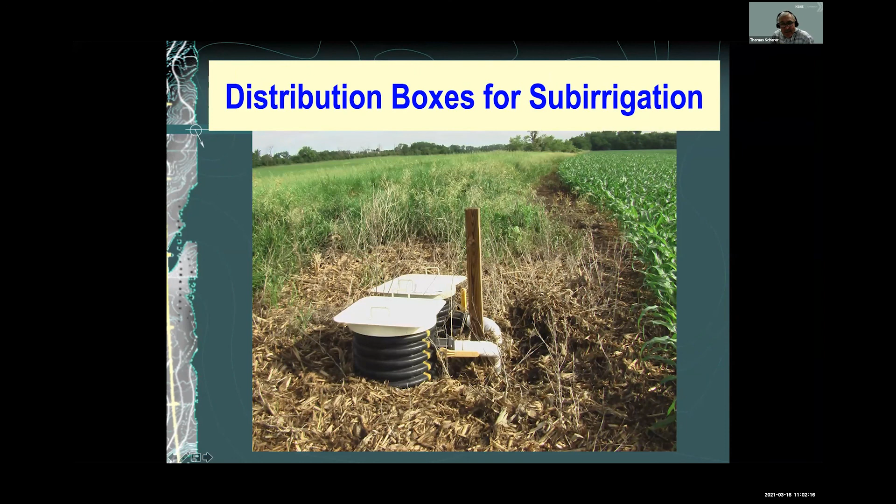And then this up at the top part of the field here is two diverters. The water comes in here, and he's got, this one is on, this one is off. And if you look inside, he just dumps in, and these are connected to his sub-irrigation system. He's seen a difference of between 50 and 80 bushels per acre on this field since he put this system in.

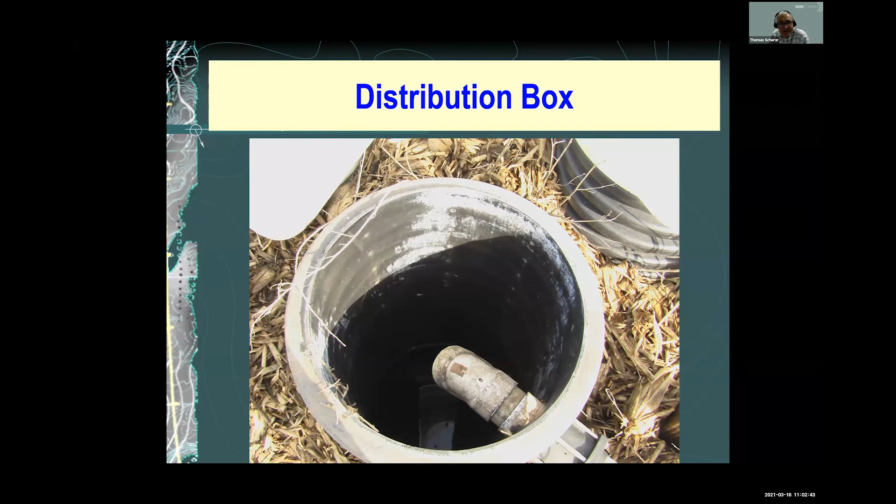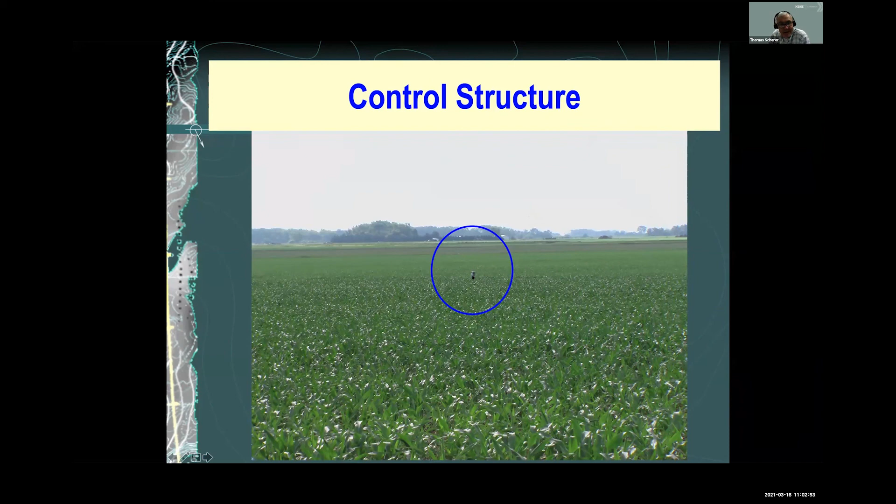He's really quite happy with it, and he's got another field nearby that he's putting in something similar to this. Again, using the existing topography and his knowledge of the field. And so out in the field, he's got a control structure. That's what he sets the level at on the one side of the field.

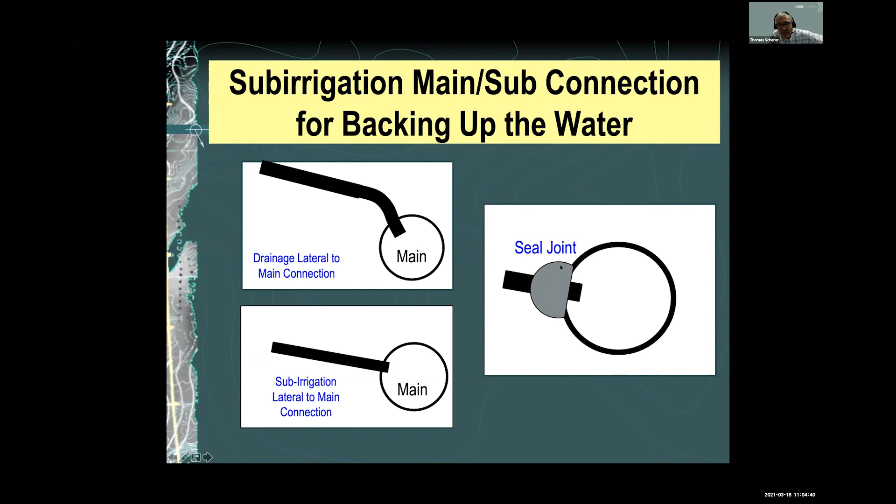The gentleman that we worked with that put in the sub-irrigation system actually used a foam. He foamed every one of these to seal them off so that none of them leaked. And if you're delivering water, like the one gentleman, this is his supply line, the upstream side.

And again, he sealed all that with foam, and then he set them all so that these lines could be at different levels in here because they wanted an equal amount of water going into every one of them. So there's some design requirements that you have to do.

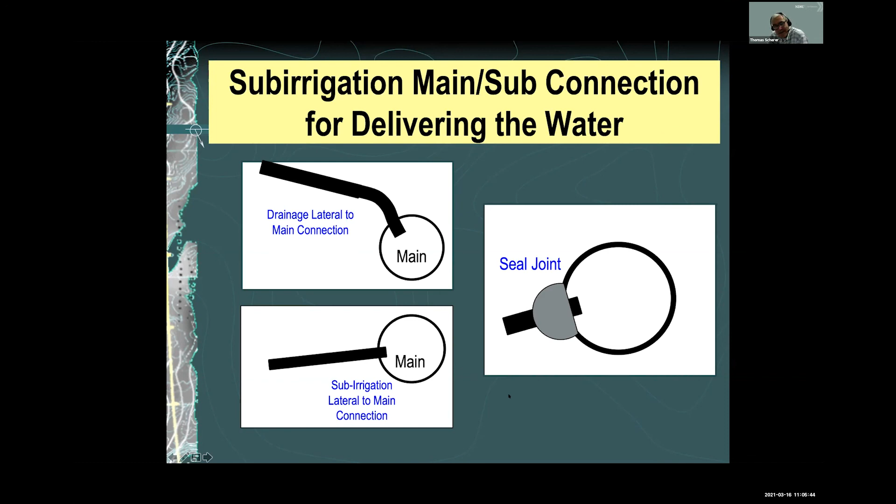So I just want to point out, if anybody is looking at sub-irrigation, this is an important point: make sure that your connections are such that you can get the water into the tile line uniformly all the way across. When you've got 100 laterals, you've got to make sure that the water is entering all of them equally. Otherwise, you end up with wet spots in the field. And we found that in some of these fields.

So, John, that completes my presentation. More than willing to answer questions if I can.